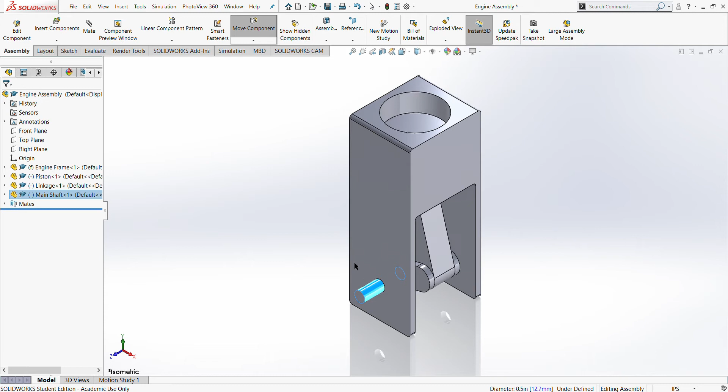This assembly consists of 4 different parts which are mated together to create the piston. As you can see, each part's limitations are defined. Here are the 4 parts: the frame, the piston, the linkage, and the main shaft. So we're going to be creating this to get to know how assemblies work.

Okay, so the first part that we're going to create is the frame. So just like all the other times, we're going to go over to File, hit New, and select Part.

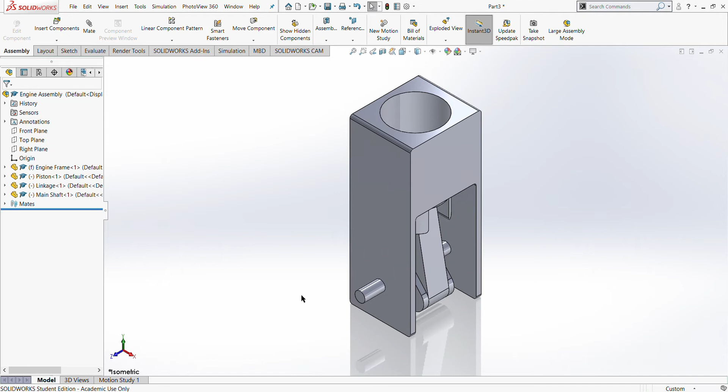Now we got to show all of the planes, and we can begin. First we want to start with our sketch. We're going to create a 3x3x3 cube, but before we do any of that, we don't want to create this in millimeters. I'm going to be using inches for this. The way I change the main measurement is if I go down to the right, where it says Custom, and I choose IPS, which is inch pound second for the units. This will automatically make everything I do in inches.

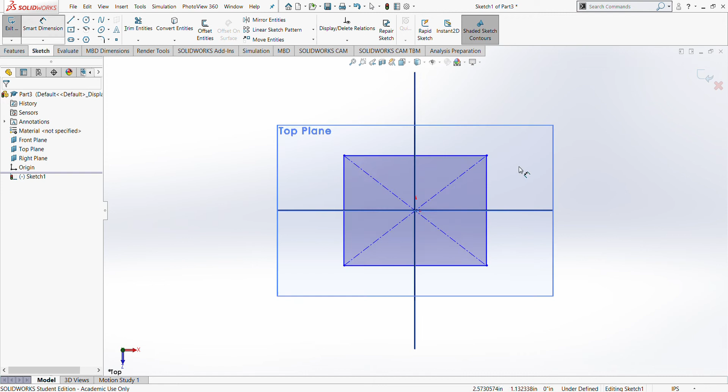So I'm going to go ahead and select a plane to sketch on, and draw out a square to make a 3x3x3 cube. I'll speed through it here. I'm going to make this 3, make everything equal, and then extrude it using the midplane feature so it's symmetric, make it 3 inches, and hit the check mark. Now we have our cube.

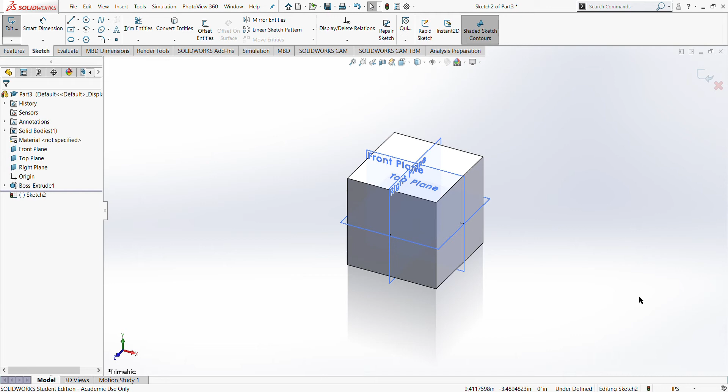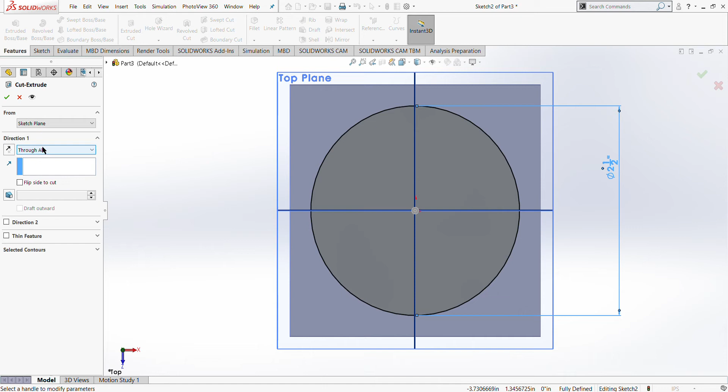The next thing we're going to do is cut out a 2.5 inch diameter hole at the top. If I sketch over here and use my Control 5 key to go to the top, I can make a circle up top, smart dimension it at 2.5 inches, and go over to Features and choose Extruded Cut just like we used before to make a cut through here. I'm going to use the Through All option under the drop down. If you hit where it says Blind, you select Through All, and if I pivot over here, you'll notice it goes all the way through the solid. I hit the check mark, and that gives us our circle.

So now I'm going to be doing something new with this cube. I'm going to make the sides, but I'll be using the mirror feature to mirror it onto the other side, so we only have to do one leg.

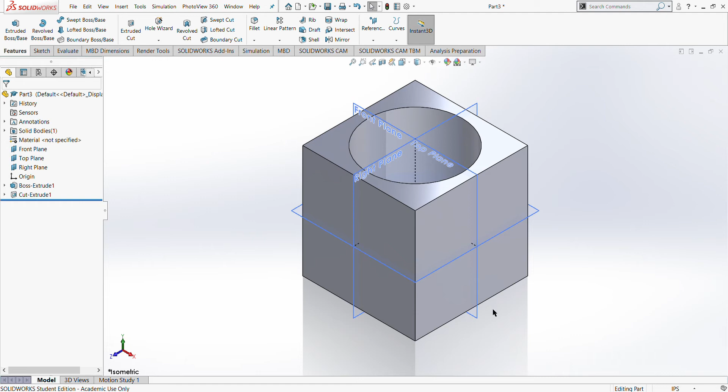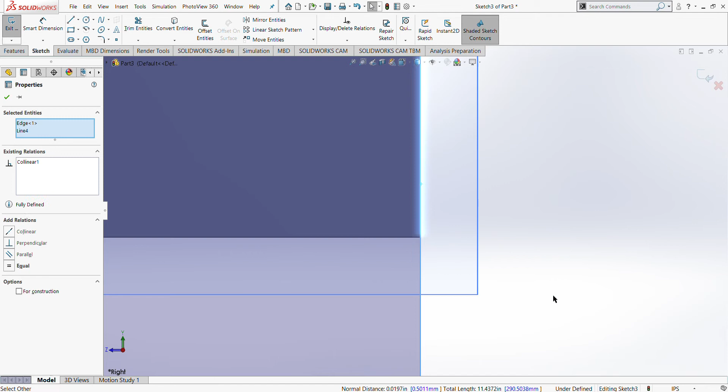I'm going to make a sketch over here, using my control keys to go to where I want. Then I'll use the corner rectangle tool and sketch down. I want this to be in line with the cube up top so it has nice symmetrical legs, and then smart dimension this to be 8 inches.

Now I can extrude it out so it's no longer just a sketch and it's an actual solid object. I'm going to make this 0.25 inches. You can see it extruding out over here, and hit the check mark.

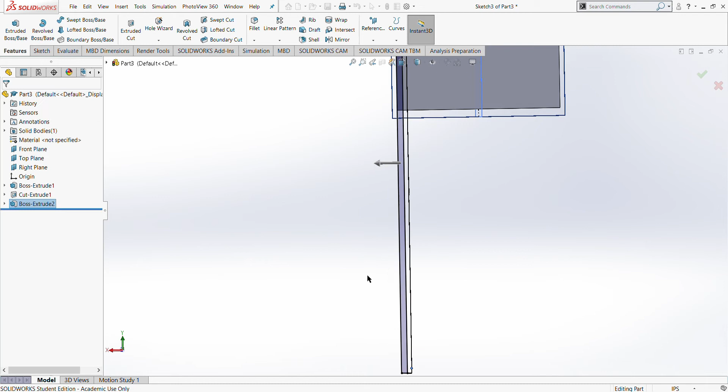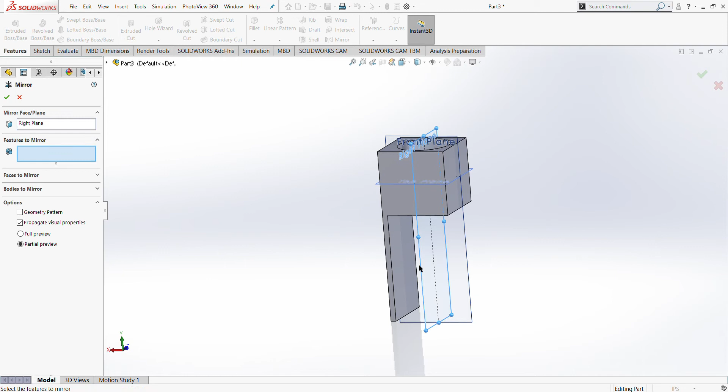So now we have one leg, but we want to mirror it onto the other side. The way we mirror features in SolidWorks is we choose the linear pattern feature under the Features tab, hit the drop down arrow at the bottom and choose Mirror. Now it asks for the mirror face and plane. I'm going to choose the plane right in the middle, the right plane. Then it's asking what I want to mirror, and I want it to be this feature I just created. It gives you a preview of what it's going to do, and I can hit the check mark, and now we immediately have a mirrored part.

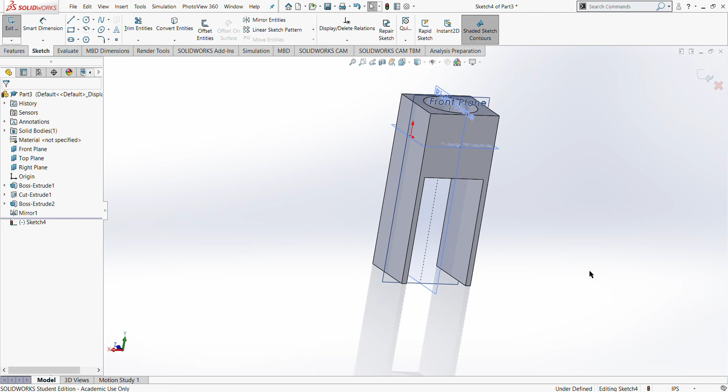Now I need to make a hole for the bottom shaft, like how I showed you in the beginning. I'm going to sketch on this side, use my Control 4 key to get to the side I want, and make a circle on the center plane so it's symmetrical, in the center. I'm going to make this 0.5 inches, and then make this 1.5 inches off the ground.

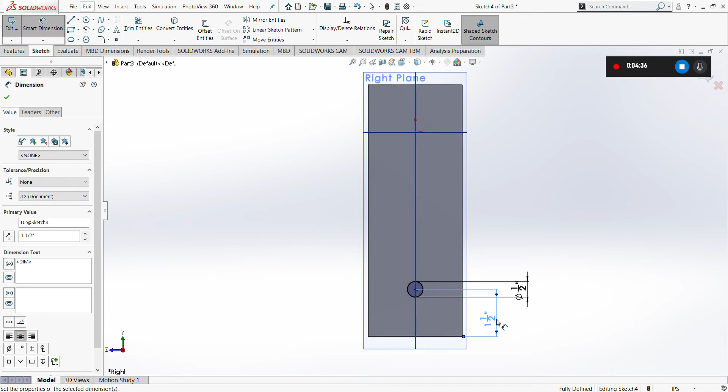Now I can use the extruded cut feature and cut all the way through using the Through All feature again. It's going to cut all the way through and make a hole on the other side as well.

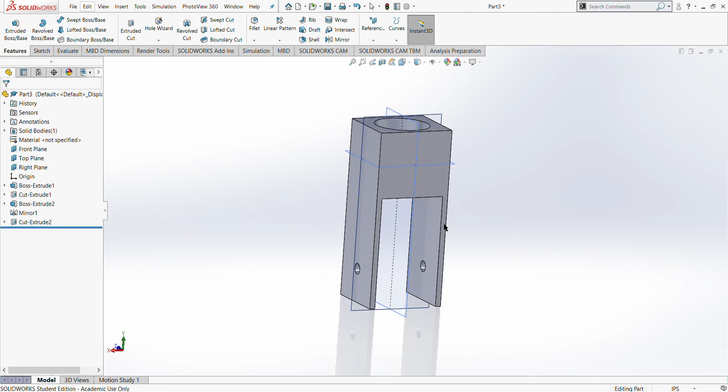Now this part is done. But something we can do to make it look nicer, and make sure there are no sharp edges, is use the fillet feature up here, just like how we used it on our cube at the beginning of the first video. I'm going to make it 1/8 inches, so 0.125, and choose these lines over here. If I choose these lines, then these edges are no longer going to be sharp points.

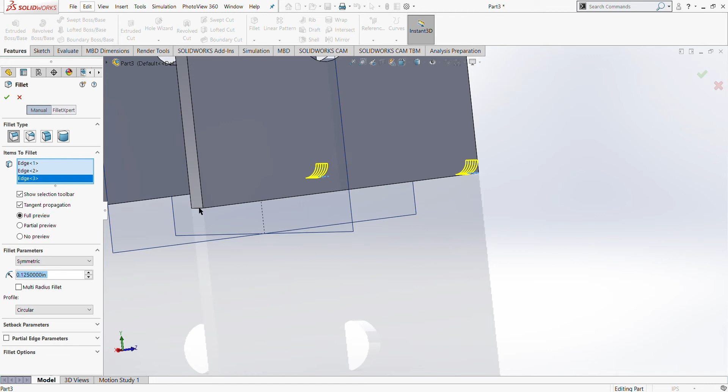I'll also choose these inside, and these edges over here. Then I can hit the check mark to finish this. Control 7 gives me an isometric view, and that's essentially what we want.

Now we have to save it. If you hit Control S, you can give it a name and save it wherever you want. I already have a place picked out, so if you don't, make a file wherever you want, and I'll name this the frame.

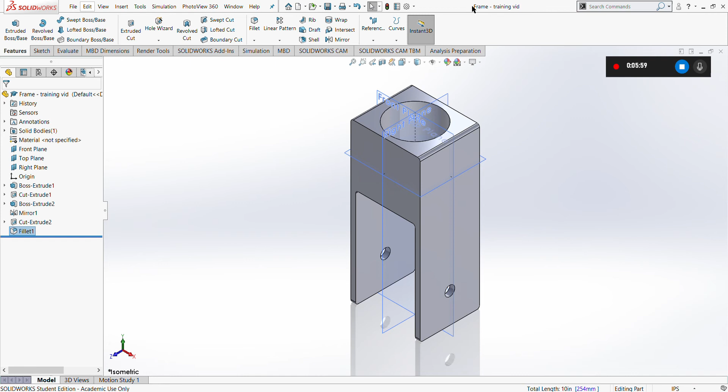And then you can see up top it's going to name itself, frame - training vid. Yes, I can capitalize, I'm just lazy.

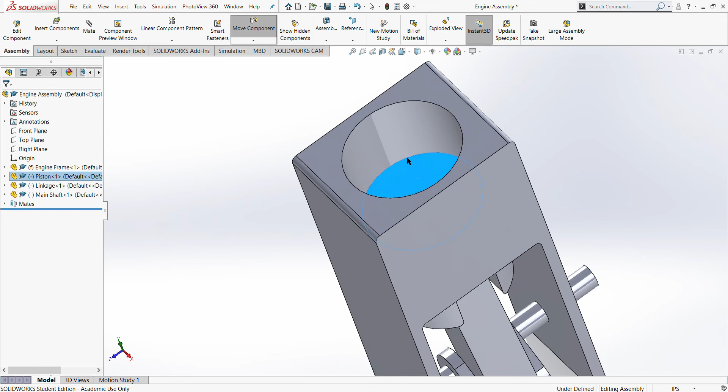Now what I'm going to do is make the shaft in the center. Actually, we'll start with the piston first, so we'll do this piston head. If I go over to the engine assembly, I'm not sure if you'll be able to see this, but this piston head over here is what we want to make.

So now I'm going to start making the head. File, New, I choose Part, and I can start making the piston head. I'm going to start that with a cylinder.

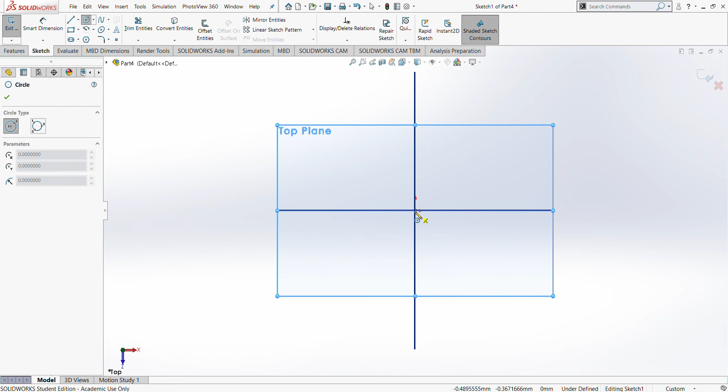So if I sketch and choose circle, I can then make it 2.5 inches in diameter. You'll notice I had to specify inches at the end because it defaulted to millimeter. So I'm going to want to change this down here from custom to IPS once again.

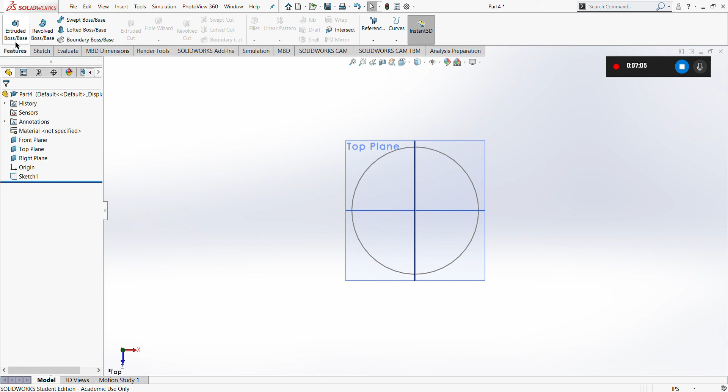Now what I want to do is extrude this circle. I'm going to hit the extruded boss base, select the circle, and using midplane, I'm going to make this 2.5 inches in height. So now I have the basics of the piston head done.

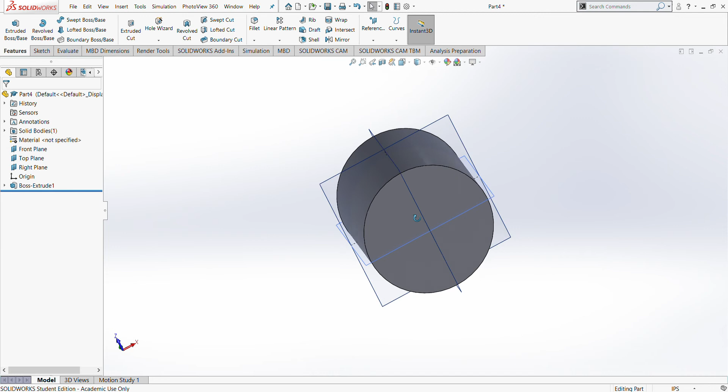Now what I need to do is make a hole in the bottom for the linkage to connect to. So I'm going to make a sketch on the bottom, use Control 6 to get to the bottom, then use the center rectangle tool. It's on the drop down, just like how you'd use for a square, except this time I'm making a rectangle.

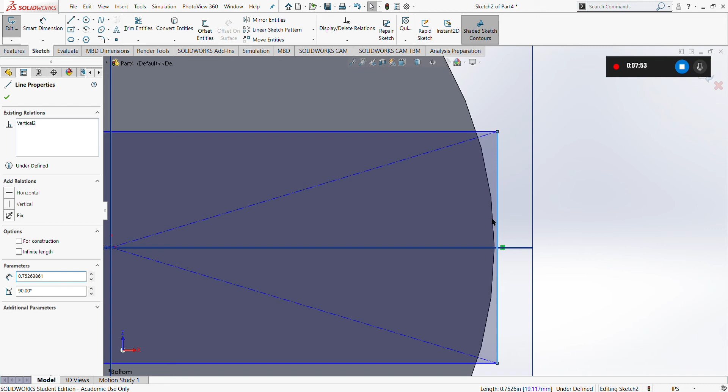So if I do this, and I line this up to the edge, by clicking this and shift clicking with the edge of the circle, by clicking this, shift clicking up here, then on the left I can choose tangent, so now it's touching this over here, and I can hit check mark.

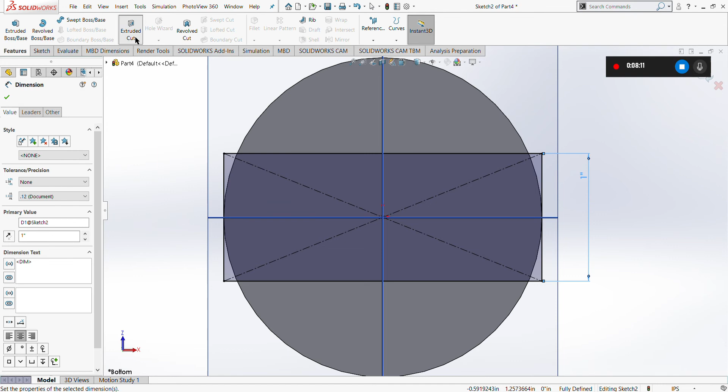Now I want to make this 1 inch wide, so I'll specify 1 inch and hit feature and extruded cut. I want to make this 1 inch deep, using the blind feature over here, and then I'll hit check mark. So now you can see we have a cutout over here.

Now what I want to do is make a cylinder with a sketch over here and extrude it all the way down to the other side. So what I'm going to do is use section view.

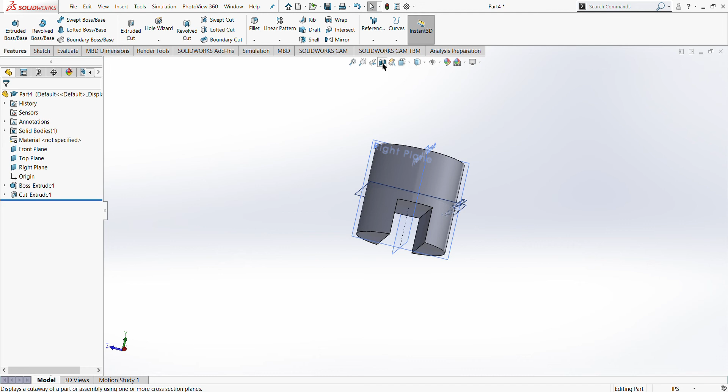So over here is a bar that we haven't really used very often. One of these options, the section view right over here, will let you see half of your part. So if I click this, it'll automatically select a plane. It can be any plane, but if you select a plane, it'll cut along that plane.

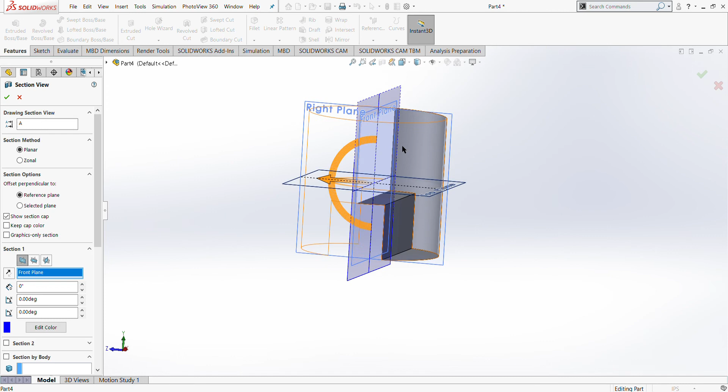It's not actually going to cut it, but it's going to remove that plane from view. And if I select this plane once again, then I can see that I have only half of this view to me. The other side is still there, it's just hidden from view, it's just cut off from view. So if I hit the check mark, now you can see I'm dealing with only half of what I need.

This lets me start a sketch over here by using right click and hitting sketch in the menu that pops up. Now I can start making a cylinder over here and extrude it 1 inch. So Control 1 to give me a top down view, and I'll start a circle sketch over here.

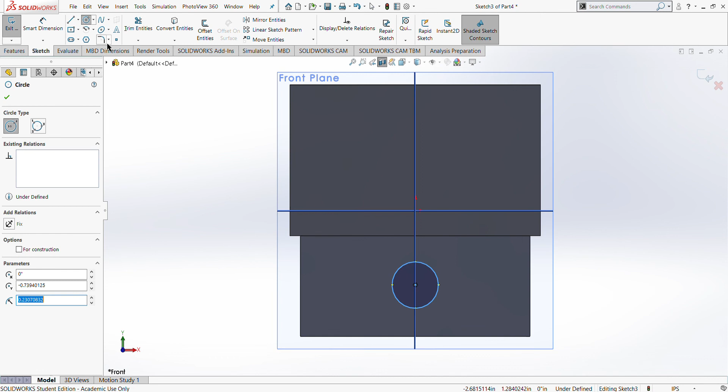I'm going to make this 0.5 inches in diameter, and then I'll make it 0.5 inches from the bottom. Now what I can do is underneath features, hit extruded boss base, use blind, and let it go 1 inch out.

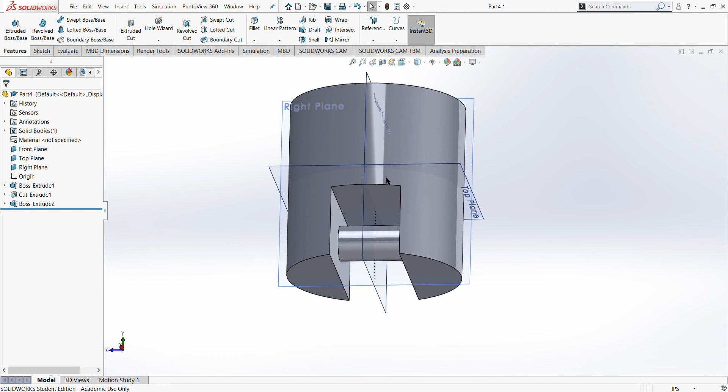Now when I click the section view button again, I can see the other side, and you'll notice that I have a bar running through here from the sketch over here. If I didn't use section view, and I hit Control 1, I wouldn't be able to see where I'm sketching, or I wouldn't be able to see the face at least.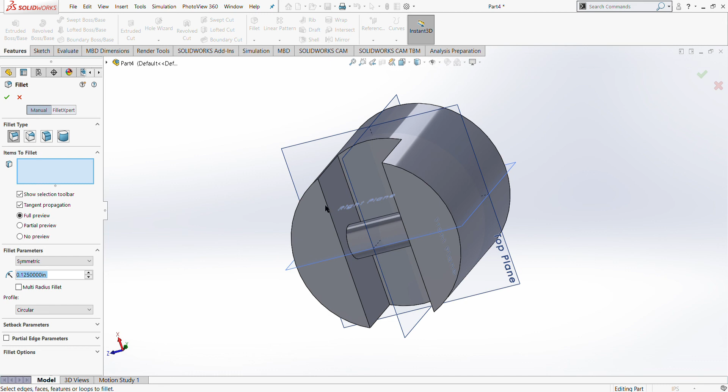So now this is basically done. I'm once again going to fillet it a little bit, just so it looks better. I'm going to use the 1/8, 1/8, and I'm going to choose these two lines. And I can hit check mark. So now that's essentially my piston.

I'm going to save this as piston. And you'll see that it saves up in the top right.

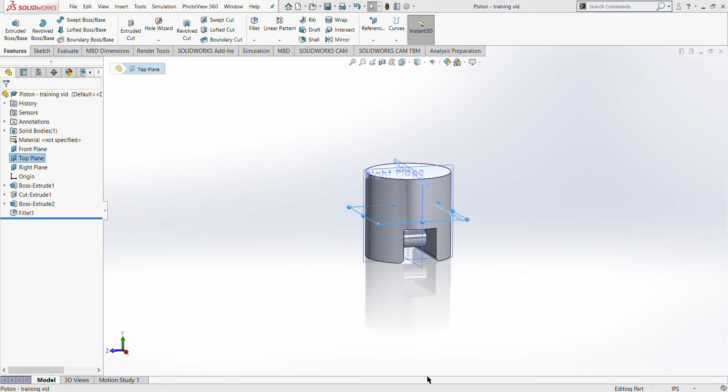Now is the part where I'm going to come to the linkages. So we have the piston and we have the frame. However, the only thing left is to make the linkages that connect. So if I go back to my assembly, I need to make this linkage, and I need to make this shaft. We're going to be covering that in the next episode. So for now, see ya.